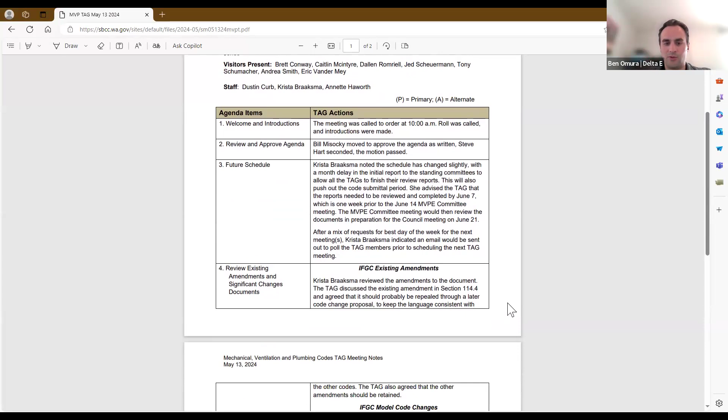These should have been posted with the meeting information for today's meeting. So I don't know if there's anything here that anyone wanted to discuss, or someone like a motion to approve the minutes. The only thing I noticed was I was not recorded as present, but I was present. Okay, we'll get you added in there. Thanks, Dave. Anyone else?

You know, I don't see my name on the present either. This was probably before you were actually on. Yeah, this was the calendar, May 13th, previous meeting. Okay, so it wasn't the one last week. Okay, right, I was not there. Thank you.

All right, so I don't know if someone wants to make a motion to approve the minutes with adding Dave on. I'll make a motion to approve the minutes with adding me as attending. Thank you, is there a second? Second. Thank you, all right, any further discussion about that? All those in favor of approving the minutes as shown, including Dave Price as attendee, please say aye. Aye. Aye. Aye. Any opposed? All right, thank you.

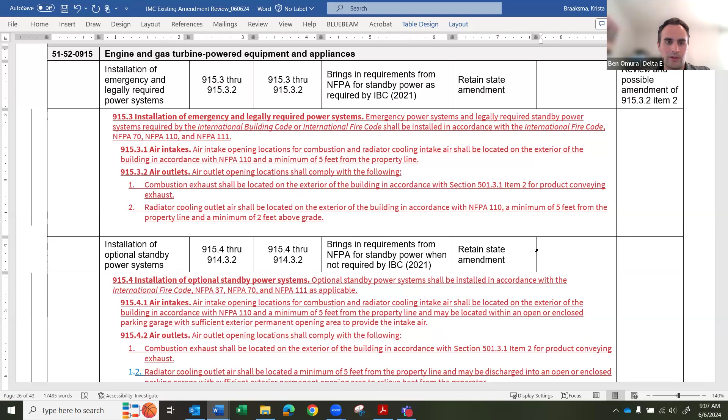Is Jonathan on? Maybe I will try to summarize what you had sent. So I guess my understanding of Jonathan's summary is that he had gone through NFPA 110 and some other notes, and found that NFPA 110 allows for the emergency power standby power systems to be located outdoors on a pad, and the requirements here would only be looking at installation within a building. So it didn't seem like there was any added restrictions imposed by this code language currently. There of course could, like if someone wants to write an amendment or a proposed amendment to clarify this section, that would certainly be something we could pick up in further meetings down the road.

Krista, I don't know if there's anything else that you saw in what Jonathan had sent. No, that was pretty much what I got out of it. Okay, yeah, so anyone else want to discuss any other items around this section that was added last code cycle? Or do we want to move on to just recommending to retain it?

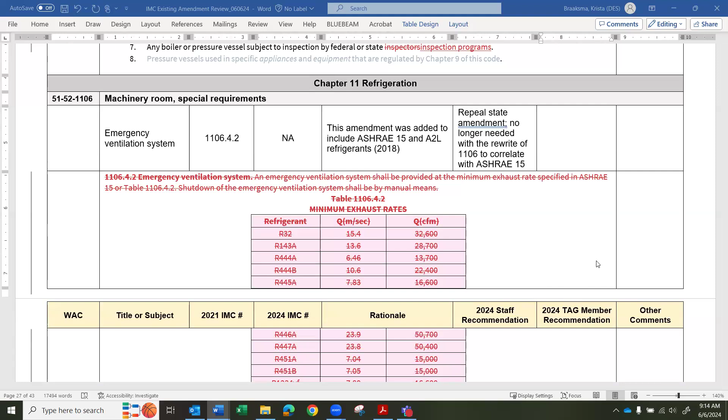Okay, now we get into refrigeration. We originally had an amendment to section 1106.4.2 for A2L refrigerants and reference ASHRAE 15. However, the model code now has all that information in it, so the staff recommendation is that we do not need this state amendment any longer.

Was the table for the exhaust rates actually a state amendment, or was that part of the model code language before? That was part of the state amendment, and I think it came directly from ASHRAE 15.

Okay, yeah, I think there was just an additional line provided. Oh, okay. But yeah, I guess like you're saying, Krista, this is really kind of following the model code guidance to provide more specific direction per ASHRAE 15 on ventilation requirements that are now in the model code.

Makes sense to me, and the codes on refrigerants are changing rather quickly. More to come, but this is the current state of affairs. So good to keep up with ASHRAE 15 is my point.

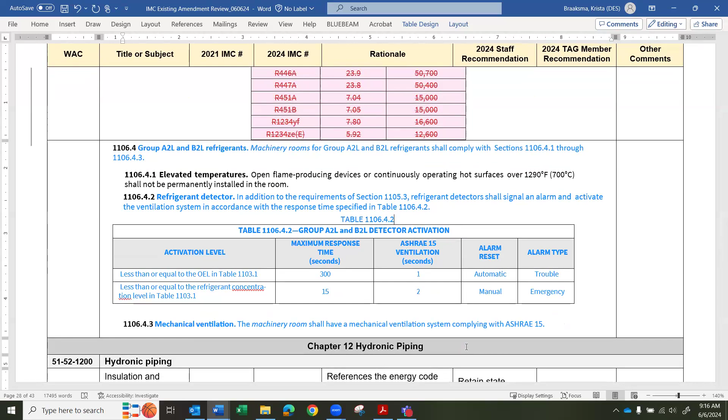And this makes sense to me too, to also repeal the state amendment. And where is ASHRAE? Oh okay, there it is. Gotcha. Cool.

Well, I will make a motion to repeal the state amendment for section 1106.4.2, and, well, isn't that enough? Yeah, I think that's probably good for this section. I'll second that. Thank you. Okay, so motion is seconded.

Any discussion regarding repealing the existing exhaust rate table that's in this section? All right, hearing none, all those in favor of recommending repealing the state amendment for section 1106.4.2 as well as table 1106.4.2, please say aye. Aye. Any opposed? Okay.

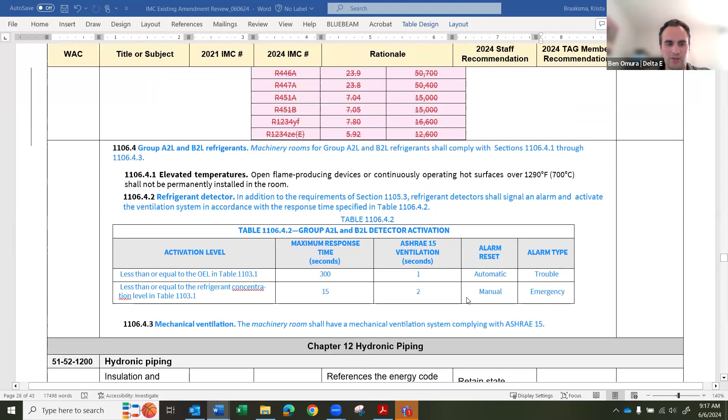And that section above, Krista, that's all new model code language, right? So we're not, yeah, that part of this language was replaced with this language. All right, so we'll look at that more in the next section. All right, thank you.

So the amendment to section 1209.5 adds in the energy code requirements for thermal breaks and insulation on outdoor snow melt systems, radiant floor heating, all that.

Yeah, Krista, do you have more? Maybe this might be a good one to revisit in the near future, just to see if there's any alignment needed with energy code requirements. I've seen this before and it always puzzles me why we're putting these insulation requirements into the mechanical code, and I would hope it would be covered in the energy code.

Yeah, I'm accustomed to just pointing to the section that references these numbers and following the philosophy of saying it as few times as possible in the most likely place. I think the intent was just to not force someone to go pull out another book.

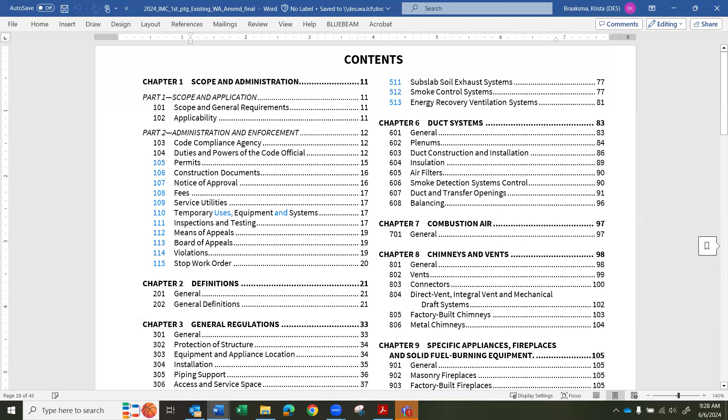Aha, my internet came back. It's playing the hokey pokey here. I'm just going to relocate to a new space that has internet connection. I apologize. All right, I heard you fine. So, oh, okay.

Yeah, you have to also kind of look at the next two sections. They specify the requirement for thermal break, for radiant floor as well, those sections in the 1200s, right?

It is logical that requirements for radiant floor heat inside a space would require more insulation than an outside snowmelt system. Even though the snowmelt system is subject to more extreme temperatures, it only operates for short periods of time during those extreme temperatures, whereas the in-floor radiant operates 24/7, 365.

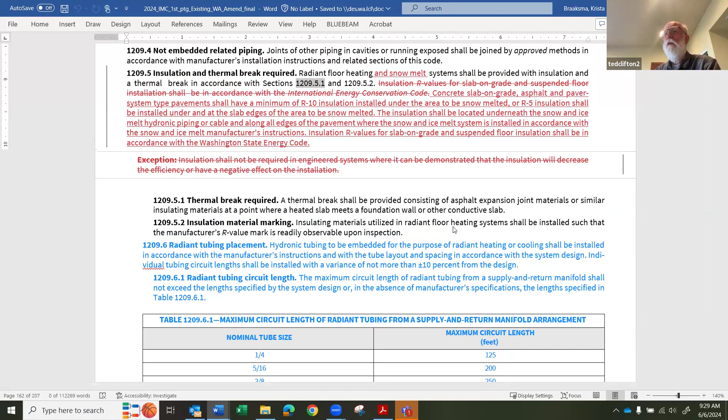Yeah, I would say that seems to be the intent. There could be some improvements to make sure it's clarified, and also make it so it's obvious what type of system it's applying to as well, because 1209.5 is for both radiant floor and snowmelt. A lot of the added language is directed for snowmelt only, right? But then, yeah, I mean, last sentence could potentially apply to both system types.

Yeah, good point. I mean, just thinking for that potential code change proposal, that first sentence in red, it'd be nice if it said for snowmelt systems and then just go on, or even make a subsection for that. But that's a code change proposal.

All right, so I guess Kevin, you feel, or you want to just kind of keep the initial motion? Yes. Okay. But yeah, appreciate the commentary, and thanks Mike for providing some additional feedback. Anyone else have any comments for this or not?

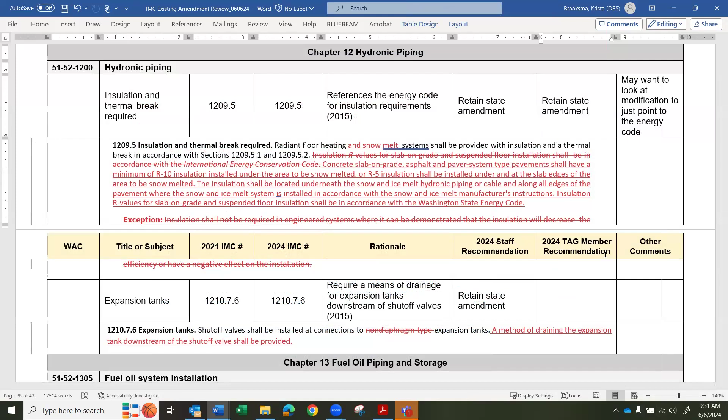Okay, the next one just adds a requirement for being able to drain the downstream of shutoff valves.

All right, any discussion on this section? It's from the 2015 code cycle.

So I have a question. Wouldn't that be upstream of the shutoff valve? When you're speaking of draining it, the water's going from the tank either past the shutoff valve to something else, in which case the shutoff valve has to be open, or prior to the shutoff valve is where a drain would take off to the side that would allow you to drain everything above the shutoff valve. I think the language here is just goofy. Yeah, and I guess like Ted, you're thinking the drain needs to be occurring between the shutoff valve and the expansion tank.

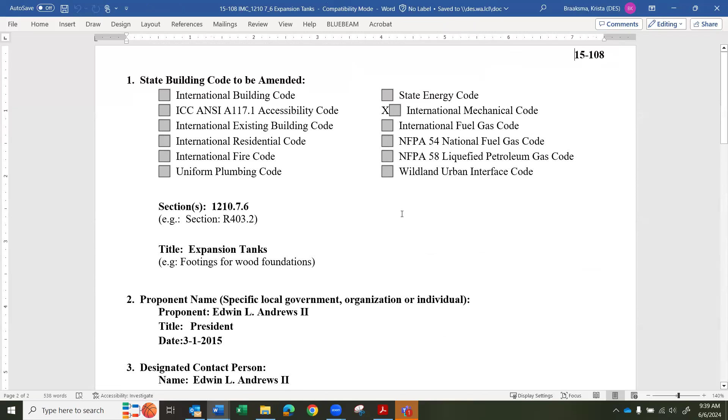Ooh, Krista's got it right here. Yeah, it just doesn't say much.

So yeah, it changed considerably during the original process. The proposed language was a little bit different.

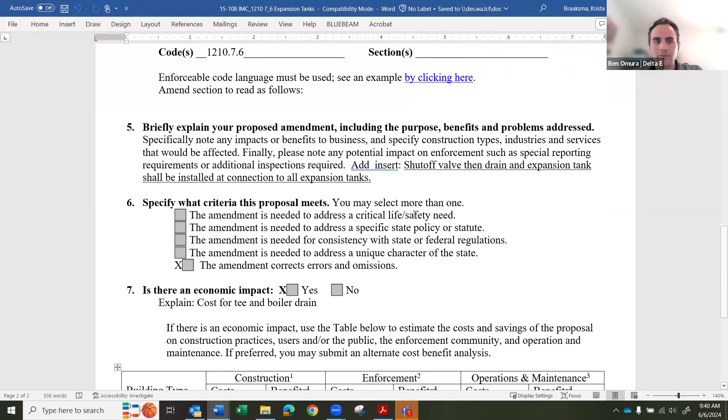And there's not much on a rationale here. Right.

And I noticed the cost benefit is for residential only. Those are probably little diaphragm tanks. 5 cent cost, that's per square foot, I believe. Oh, the radiant system. Thank you.

Well, I'm just going back to these words, downstream and shutoff valve. I think the intent is, what I'm seeing in my head anyway, you have an expansion tank in line with the hydronic system. You've got a shutoff valve to it.

Again, the downstream doesn't quite make sense. You kind of need another drain valve between that shutoff valve and the expansion tank to get the water out of there. So downstream doesn't make sense because in an expansion tank, the water goes in and out, right, depending on the pressure.

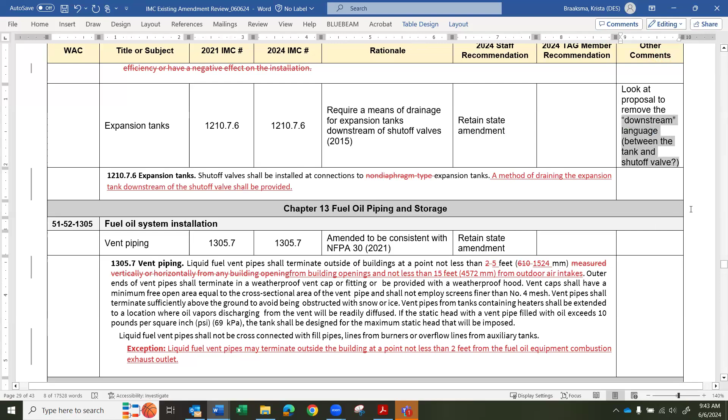Then we have to recommend a code change proposal because it makes no sense like it is. I do see some low-story commercial buildings that are set up in the same system as residential properties.

And that's essentially what I have, but this makes no sense for what I have. It makes sense to have a method of draining if the tank is in the typical upright fed from the bottom position, but it doesn't make sense if it's hung below the fill pipe, as it tends to be these days with the air bladder tanks. Maybe just put a suggestion in there that it requires this if it's being bottom fed.

And again, that's a code change proposal. Yeah, which I'm totally fine with, but we need a code change proposal because this makes no sense. It's not complete, it actually needs a section.

That's interesting. Our options are either approve or code change proposal. We're kind of stuck with those two options unless there's a model code change. Right, because right now you're operating without any public notice on a specific requirement to remove or add stuff.

So you just need that added layer so you can make the announcement on the agenda that we're going to talk specifically about changing this section, so anybody that has an opinion or interest in that particular section can attend.

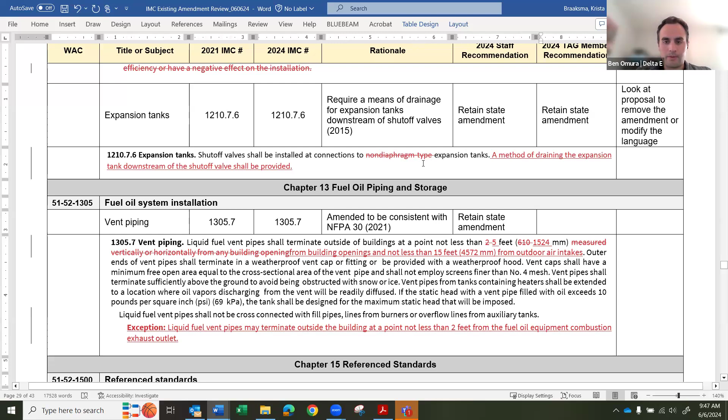Okay, 1305.7, amendment to be consistent with NFPA 30.

All right, so it looks like this was added last code cycle, but there's not a new NFPA 30 that's been published. Is that correct? I don't believe so.

It looks like 2021 is the last one. Or no, there is a new one. There is a 2024 edition. Yeah.

However, what is the model code referencing? Model code still references the 21 edition. Well, there you go. Oh, wait a minute. I'm looking at the 21, so of course it would. Oh, right, where did I put...

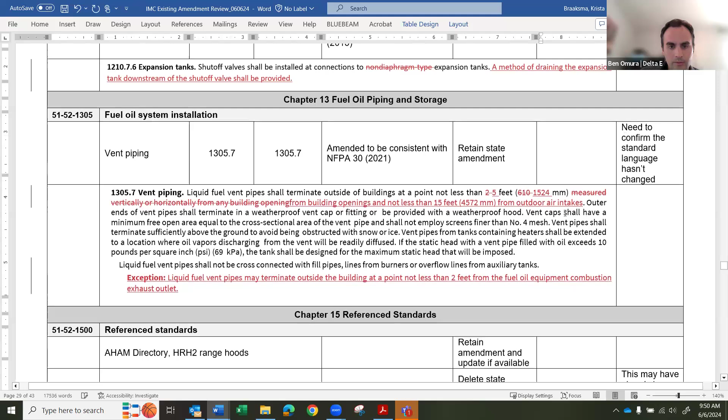I'm guessing this hasn't changed in terms of the clearances, but I think it would be good to confirm there's no change on the NFPA side. Yeah, I can do that. I'm not finding my code right now. Okay. There it is.

All right, so I guess, Krista, we're gonna take a look at the 2024 edition. Yeah, I'll take a look at it. Okay.

I guess, could we just recommend to retain it pending any NFPA changes? Makes sense. I mean, this may not have any changes in NFPA 30, but if there's a note there to catch that, then pick it up.

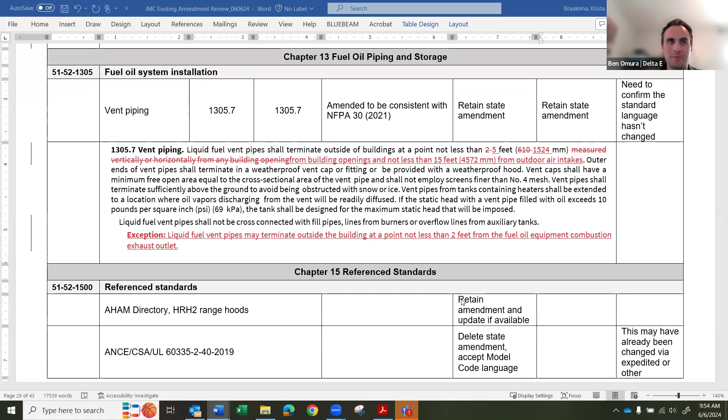Okay, so the rest of the changes or state amendments are reference standards associated with the other changes. I do have noted that the council will be looking at a possible rule change to update the UL 60335-2-40 standard to the one that I think is now a 2022 standard, the 4th edition, referenced by the statute. And they will be determining whether or not we go through special rulemaking to do that, or just not comply with the statute until the 2024 edition goes into effect.

And some of these will have updated editions. I haven't gone through and checked all of them, but I will go through and update to the more recent edition for ASHRAE 62.2. So I don't know if anybody wants to comment on any of the UL standards or any of the standards.

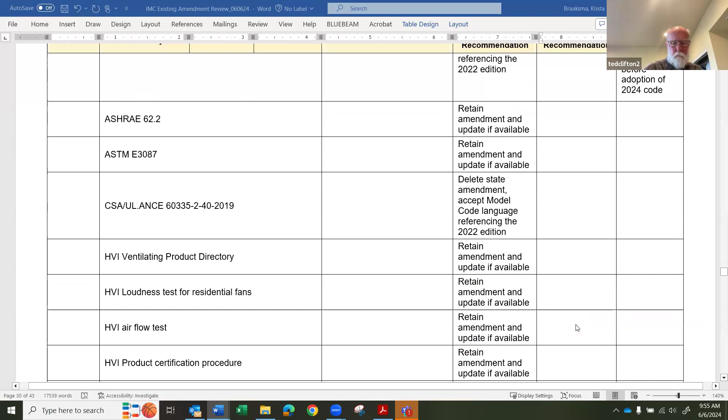Want to just do these in one swack? My name is Harshad Inamdar, I work for Rheem Manufacturing. May I speak? Sure, Harshad. Yeah, sorry, I couldn't find the hand gesture, so otherwise I would have raised my hand.

But at least I think the UL standard that I see on the screen, 60335-2-40, the latest edition is the 2022 edition. Right, and that's what it says in the comment. Oh, okay, that's... sorry, yeah, okay, the model code edition is the 2022.

But the council will be determining whether they adopt that standard before the 2024 code goes into effect, or if they'll wait until the 2024 code to make that change.

So this might get put into the 2021 edition? Yes. And that would be the same for the other 60335 section at the bottom? Since there are so many standard bodies in the name, it's added under each one, under ANCE, under CSA, and under UL in the reference standard section. There would also be associated changes in Chapter 11 for the 2021 to reference the more recent versions of that and ASHRAE 15.

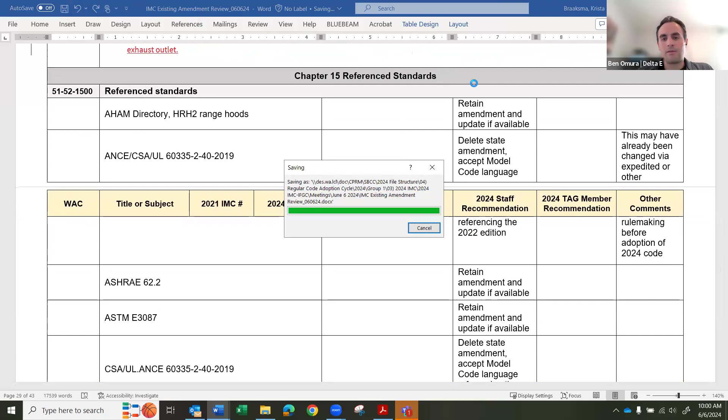So Krista, does that wrap up the existing state amendments? I don't think there were any others. Did we cover the fire one that I was supposed to look into while I was having internet connection issues? We did talk about that one and moved to retain it, Jonathan, based on Krista's summary and findings, which she forwarded to me, so I provided a secondhand summary of that. Perfect, I just wanted to make sure it was clarified for you folks. Thank you.

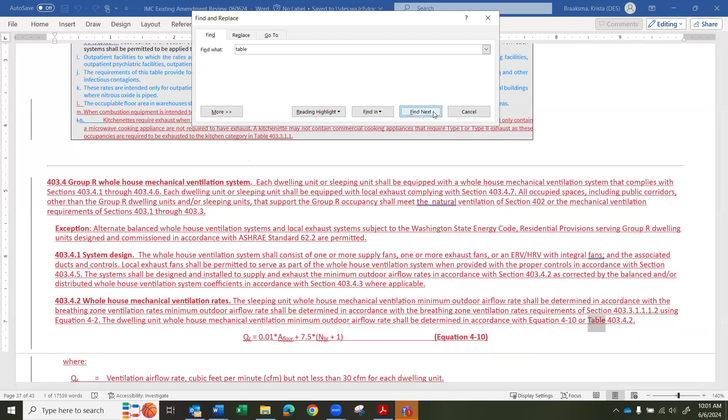All right, doing a search for table takes a bit longer than expected, there are a lot of tables. You can put a space in front of the search to eliminate those, right in front of the key.

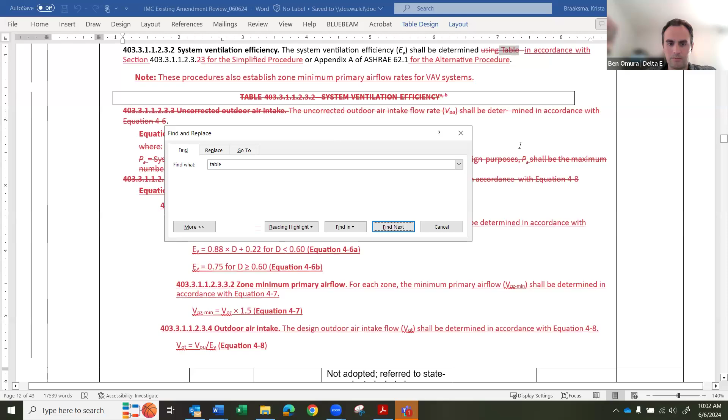That was just until we've reviewed the model code changes. Same with this. Okay, so we've got one table to look at for chapter 4 changes and one table to look at for chapter 5 table changes.

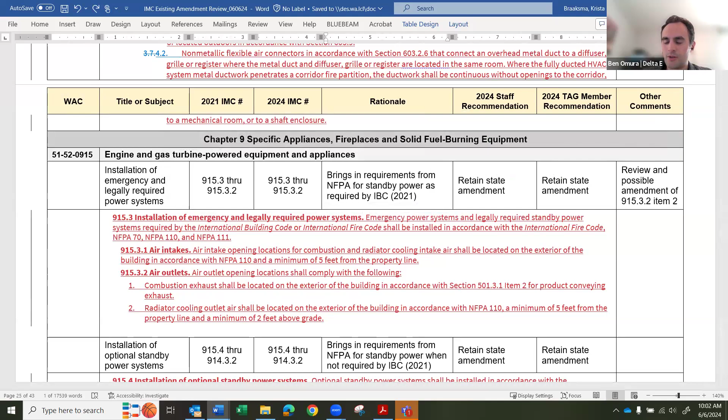All right, awesome. We move on to reviewing the model code language, and again, we're providing recommendations here to adopt the changes, but that doesn't preclude us from doing additional work to look at proposed changes to those sections further on following the issuance of this report. The main purpose here is to flag things that have a significant impact or possibly add additional costs to the code. We won't necessarily be changing them, but we can make a recommendation that a code change proposal be generated, or if there's a conflict with a state amendment or statutory requirement...

We can look at assigning someone to write a code change proposal, or if it's easy, just recommend minor changes. But the big thing is to identify where there are big changes in the code, so people with an interest don't have to look through the entire code to know where the changes are that they may want to look at for developing their own code change proposals.

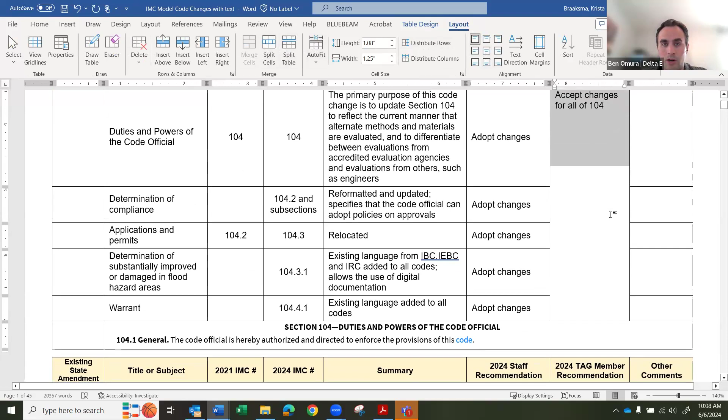When I reviewed the section 104 changes, I would agree with the staff recommendation that there was no cost impact associated with that. So I can make a motion to accept the model code changes for section 104. Is there a second for that? Second. So motion and second to go with the recommendation to adopt changes to section 104. Any further discussion here? We looked at this a little bit when we looked at the fuel gas code, as Krista mentioned, so it's pretty similar. Hearing none, all those in favor, please say aye. Aye. Aye. Aye. Aye. Any opposed? Thank you.

Section 112.3 just states explicitly that the qualifications for the Board of Appeals has to be from people who are familiar with the provisions of the code, and not just any employee of the jurisdiction.

Sounds like it makes sense. I don't have any issues with that being added. A lot of jurisdictions completely rewrite chapter 1 as it is. This one was also in the fuel gas code model code changes. Right.

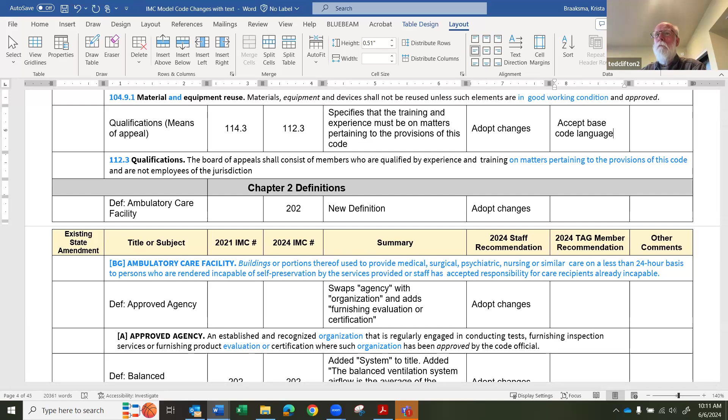I can make a motion to accept the new base code language in section 112.3. Second. All right, motion is seconded. Any further discussion? All those in favor of recommending adoption of model code changes to section 112.3, please say aye. Aye. Aye. Aye. Aye. Aye. Any opposed?

We have a number of new definitions and modifications to definitions. The first is a definition of ambulatory care facility. I haven't looked at the DOH requirements to see if this is consistent, but I am guessing that it is pretty close. I think it might have actually come from John Williams to begin with, and I'm sure that if it doesn't, they will be submitting a code change proposal.

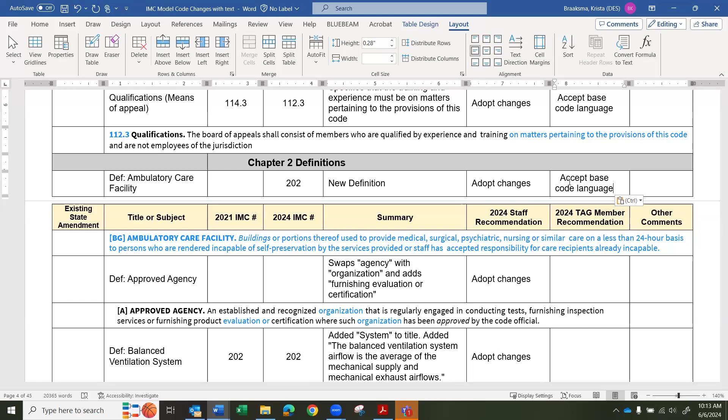All right. Okay. Anyone have anything to bring up for this one, or feel that it is adding new cost or other significant changes? Anyone want to make a motion to recommend adoption? So moved. Thanks, Ted. I'll second. Motion is seconded. Any further discussion for this definition? Hearing none, all those in favor of recommending adoption of new definition for ambulatory care facility, please say aye. Aye. Aye. Aye. Any opposed?

The definition of approved agency was changed by replacing agency with organization and including that it be product evaluation along with product certification. I will move for approval of this one. Is there a second? I'll second. So motion to recommend adopting model code changes for approved agency definition. All those in favor? Say aye. Aye. Aye. Aye. Aye. Any opposed?

And a modification of balanced ventilation system - they added system. This is one where I think we had discussed during the existing amendment review that the new definition they have here does change what you could potentially balance the system at. So I would say it's probably reducing the requirements in some ways, or at least allowing for a lot more variation in how the system could be balanced between the supply and exhaust air.

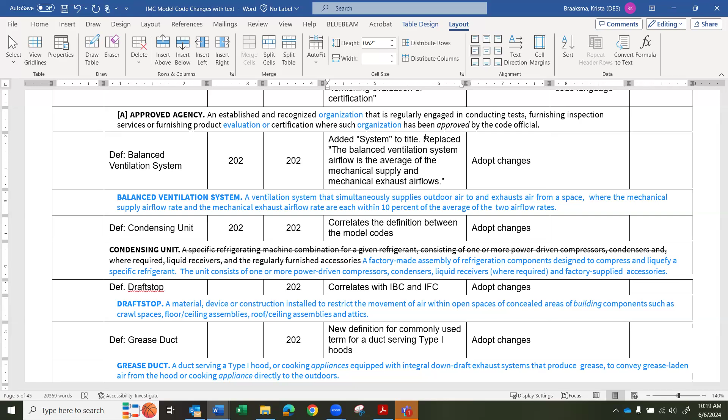All right, Ted, did you actually have a motion? Yeah, my motion was to recommend to adopt this change. Okay. Down for the second. Okay, so any other further discussion?

I guess I will say the new language is specifying an average versus I believe that the older language was based on the supply airflow rate. So we can look at that further as we move forward, but any other discussion for this one?

All right, all those in favor of recommending adopting the definition for balanced ventilation system, please say aye. Aye. Aye. Aye. Aye. All right, any opposed?

Okay, next is the definition of condensing unit. And this just tried to correlate the definition between all of the model codes.

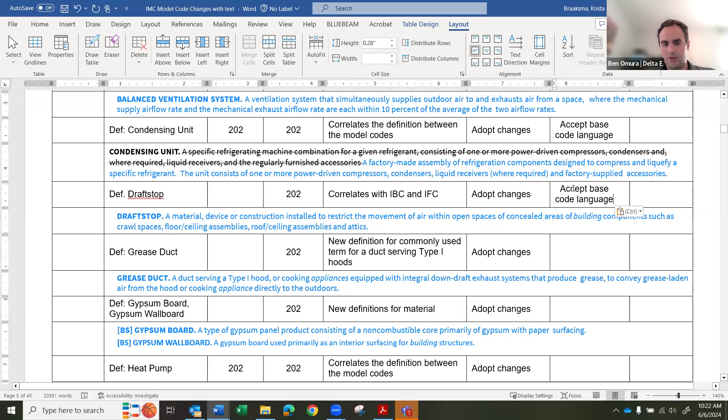So I move to recommend adoption of that change. Second. All right, motion to recommend adoption of definition for draftstop. All those in favor, please say aye. Aye. Aye. Aye. Any opposed?

And then the new definition of grease duct.

I'll move to accept. I'll second. All right, any discussion here for this new definition? I think we saw it a bunch in some of the existing amendments, and we'll see it more.

I'm confused by this definition. Why is integral downdraft exhaust system included in here when this could be updraft, side draft, anything, if it's a type 1 hood? Oh, excuse me, it's a parenthetical statement: a duct serving a type 1 hood to convey grease-laden air, or a cooking appliance. Okay, never mind, just had to talk that through. So no issue.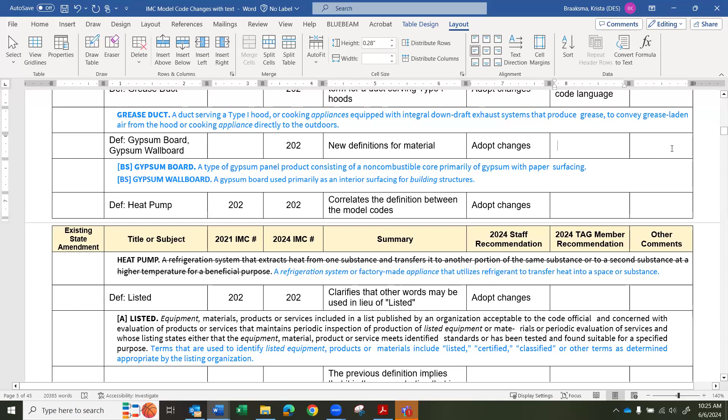I'm trying to figure out what the reason is for having two definitions. I know just above we were talking about, if you could scroll back up, yeah, the draft stop. So would a piece of gypsum wallboard, as we currently call it, used as a draft stop then not be a wall surface? Or why else would we be doing this?

Wondering if gypsum board includes ceilings as well, and wallboard does not. Yeah, it's curious because, I mean, when you go to the store, it's one product, right? GWB, it's always been GWB as long as I've been in this industry. Well, since the early 1960s when they created the first GWB, it was strips 18 inches wide prior to that.

I can pull up the rationale if you want to look at it. Maybe.

And further on in chapter 6, the model code does use gypsum board to clarify some of the materials. And I see that exceptions... gypsum... oh go ahead, plumbing, sorry. Yeah, sorry. You see the gypsum wallboard definition references the gypsum board definition.

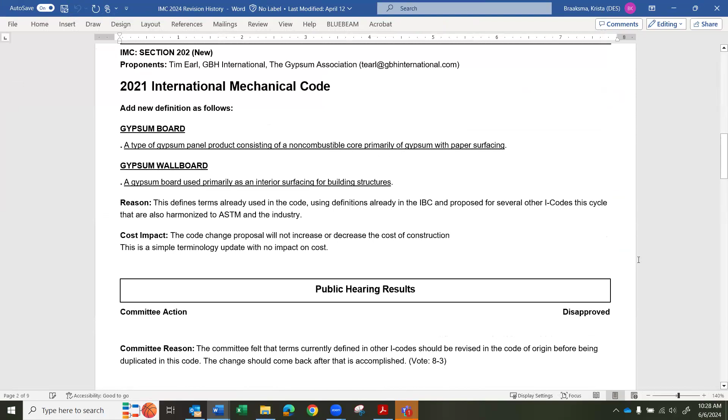Is DensGlass technically gypsum wallboard? Because maybe that's what they're looking at, is a fire rating for products on the exterior of the building to meet the 1-hour fire code requirements, and the other one does not have a fire code piece to it. They're two different types of products. DensGlass does not have paper surfacing.

See, yeah, I'm just trying to make sure. I'm just trying to help walk through the thought process of why they would separate the two out. Is it, obviously they're trying to see one has fire protection and one doesn't. And is there a product that has it exactly the same except you purchase the fire rated version? Yeah, well, you get the idea, I'm trying to talk it through with you guys.

I don't see why it's separated either, unless DensArmor or products like DensArmor would fall in that category. They are separated in the building code, if that helps. The 2021 building code's definition of gypsum board is slightly different than what they're proposing, but the definition of gypsum wallboard is the same.

Is there something associated with the water resistance of a particular product, like lining shafts, that kind of thing? Most of that difference is in the adhesives in the core, not just the surface. I mean, it's both, but maybe there's something in the ag industry or industrial that I'm unaware of. Most of my stuff is more small commercial and residential.

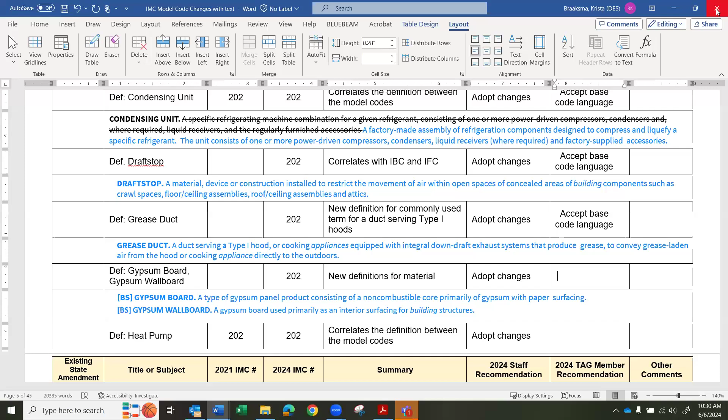So we can still continue discussion, but in the interest of time, I'll move to adopt, since that's just to align with what the national codes are doing. I'll second. Thanks, Jonathan. I think that makes sense. Any further discussion? Hearing none, all those in favor of recommending adoption of the model code definitions for gypsum board and gypsum wall, please say aye. Aye. Any opposed? Thank you.

And a modification of the definition of heat pump. I have a problem with that. So air to water heat pumps, for example, with the monoblock system, the refrigerant only transfers heat to water, and the rest of the unit transfers heat into the space. So the exact wording of this doesn't describe an air to water heat pump. In fact, it doesn't really apply to a ground source heat pump either. So it's just an incorrect definition.

Do you think the substance category wouldn't feel like it's describing a water system? I would accept that substance is anything, any material. It's not very descriptive, but it doesn't seem inaccurate, really. So substance can be the water that then gets transferred into the space. Yeah, I can accept that.

All right, and then Brad, I saw your hand come up. Yeah, I'm just getting ready to get off here and wanted to let everybody know and thank everybody for their time. All right, thanks, Brad. I think Kevin, looks like you're back on. Yeah, so is Ian. Okay, I think we should still be good. But thanks, Brad.

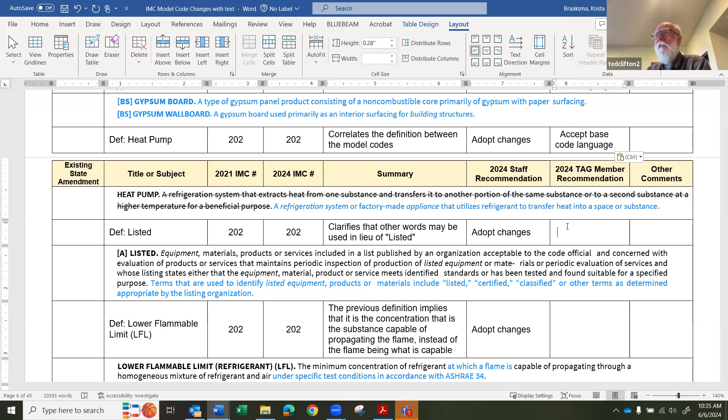Thank you. And next is a change to the definition of listed, to include similar terms to listed such as listed, certified, classified, and anything else. I think this one was in the fuel gas code as well. I think it's like a global change they're making.

I'll move that we accept this one. Second. All right, motion to accept model code changes to definition for listed. Any further discussion? Hearing none, all those in favor, please say aye. Aye. Any opposed?

And a change to the definition of lower flammable limit. I think that looks clear enough. Make the motion to adopt. Second. All right, please speak up if you have any comments for these, but try to move through these pretty quick. So all those in favor of adopting model code changes to lower flammable limit for refrigerant, please say aye. Aye. Any opposed?

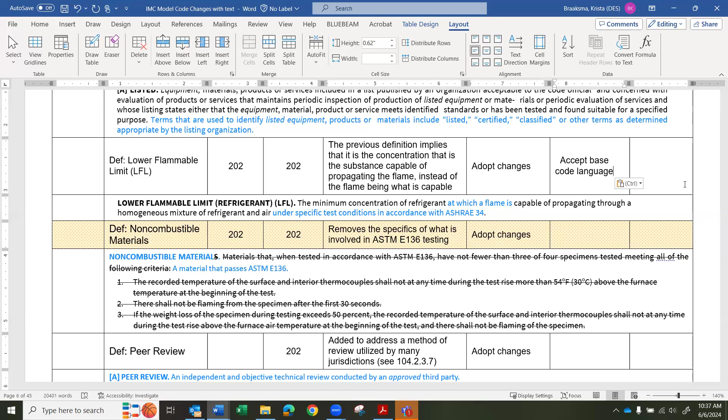Okay, next is the first one that I've marked as a significant change in the definition of non-combustible materials, where they delete out all the examples and just refer you to ASTM E136 and state that it has to pass ASTM E136.

And where the ASTM aligns with these sort of things, or does it change how this is happening? You saying these are just examples that were crossed out? Right, I think that's actually defined in ASTM E136.

All right, if that's the case, I'd move to accept. Second. All right, motion to accept. I guess kind of for what we're trying to do, I don't know if anyone has any comments on whether the model code changes present a significant cost increase or potential cost increase, as Krista was flagging.

Yeah, and if you don't think this is significant, we can take off the flag. You know, I would argue that since material selections are typically made in an office by an engineer or other qualified professional who has access to ASTM E136, this is just a clarification that sends him one place for all the data he needs, all the information he needs. So this should actually be a reduction in cost or effort.

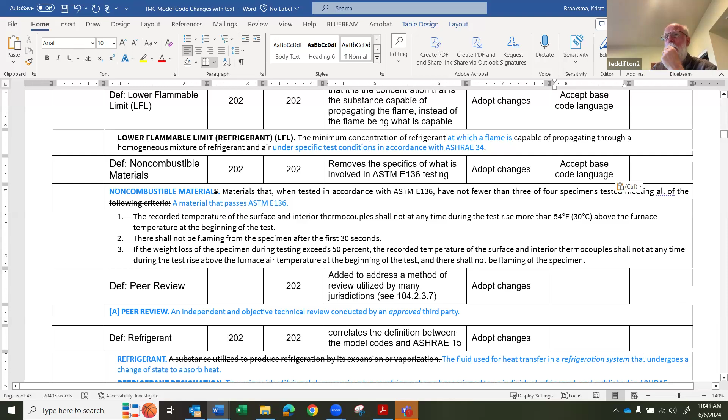Thank you. New definition for peer review, consistent with section 104.2.3.7.

Sounds good. I'll second that. In way of discussion, should we just assume that approved goes back to the definition of approved, which means it's the local jurisdiction that approves this type of third party or other agency? That's what the italicization of approved would indicate, yes. Yeah, that's what I figured. So, yeah, I'm in favor of this.

Okay. Kevin, I think, was that a motion? Sure, I'll make a motion to approve, or adopt the change to the definition of peer review. I'll second. So motion is seconded. All those in favor of recommending adoption of definition for peer review, please say aye. Aye. Aye. Aye. Aye. Any opposed?

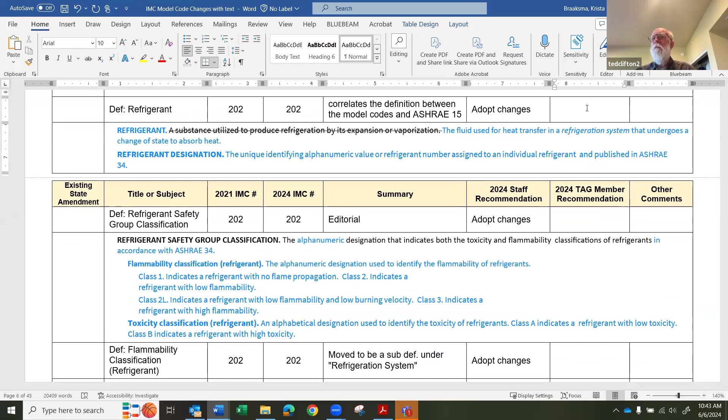I'll move that we accept this change. It makes perfect sense. Second. All right. All those in favor of recommending adoption of model code changes for refrigerant and refrigerant designation, please say aye. Aye. Aye. Aye. Aye. Thank you.

Okay, then modifying the definition of refrigerant safety group classification. And this took the independent definitions of flammability classification and toxicity classification and moved them to sub-definitions under refrigerant.

All right, I just think class 2 and class 3 need to get indented to be their own lines. That would match the model code as well. So it should be class 1, class 2, class 2L, class 3. Perfect.

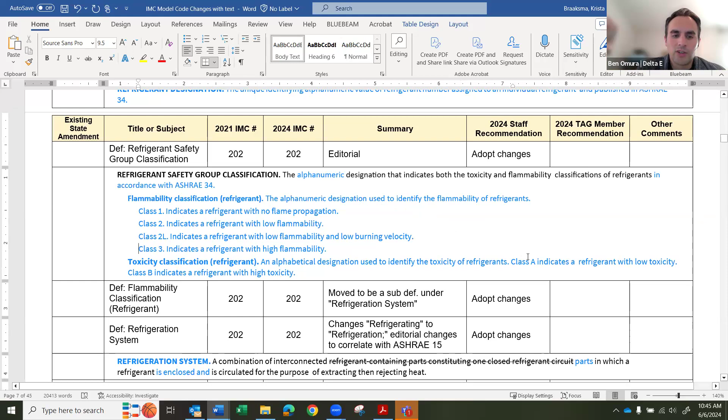Possibly the same thing on that toxicity classification. I think it's all - or is that a separate definition, Krista? Well, no, it's a sub-definition under refrigerant. Okay. Yeah. I see.

But yeah, I think Ted's point is apropos, the Class A and Class B need to... Oh, I gotcha. Yeah. That's actually how it appears in the model code as I'm looking at it. Oh, the way it's shown. Yeah, it's two sentences together. I think the two definitions had come from different sources, so they had slightly different formatting. That's how it's written now. It doesn't necessarily stay like that.

I'll move that we adopt these changes, or recommend adoption. Is there a second? Yes, second. Thank you. Okay, motion to recommend adoption for model code changes to refrigerant safety group classification. All those in favor, please say aye. Aye. Aye. Aye. Aye. Aye. Any opposed?

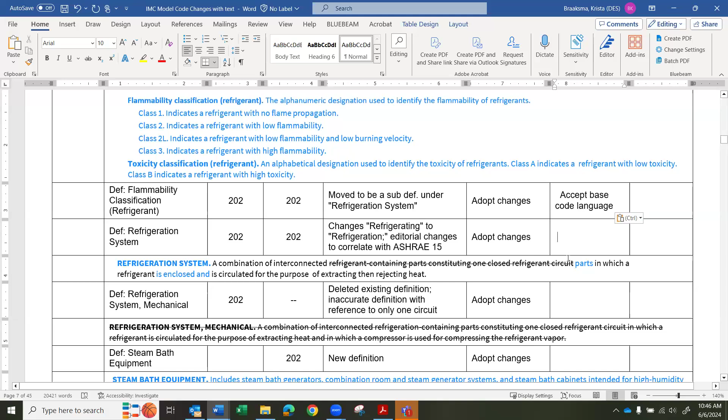And then this was actually part of that, so I'm just going to do that. The definition of refrigeration system was changed. It was refrigerating system, it's now refrigeration system, and some minor changes for consistency with ASHRAE 15.

I'll move that we recommend adoption. I'll second that. So, motion to recommend adoption for changes to the definition of refrigerating or refrigeration system in the model code. All those in favor, please say aye. Aye. Any opposed?

And the next one, they deleted the definition of refrigeration system mechanical, citing that it was inaccurate and didn't need to be there. Yeah, it's redundant. Agreed.

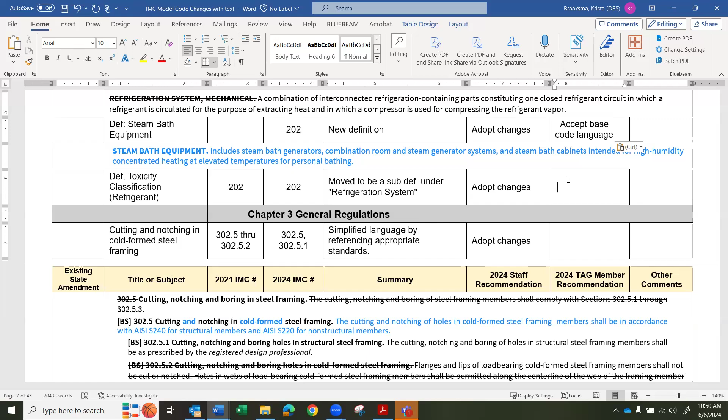And then toxicity classification was deleted from the Ts because it's now a sub-definition of refrigeration system. So I can cheat and include this under the previous motion if you want. I would agree to that. Okay, anyone have any opposition to that? I guess, Krista, maybe one thing for that is, I think it's under refrigerant safety group classification definition.

Okie dokie, thank you. And that moves us into chapter 3.

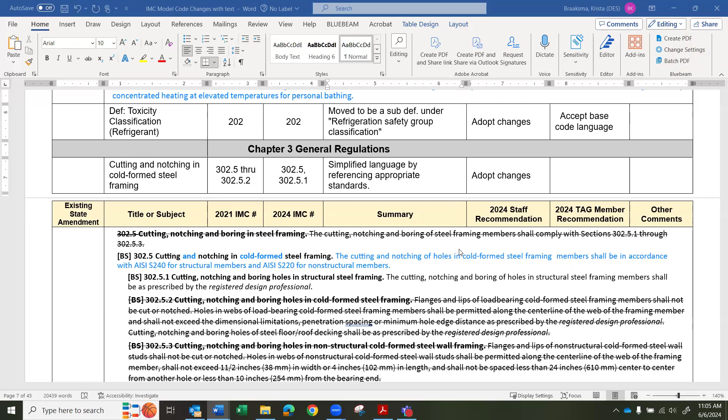So they simplified the language in cutting and notching by deleting a bunch of the text and just referring to the referenced standards. I'll move that we recommend adoption of these changes. Is there a second? Second. Any discussion here from any tag members or others on the phone? Please remember to speak up or raise your hand if you do. Otherwise, all those in favor of recommending adoption of model code changes to 302.5, please say aye. Aye. Any opposed?

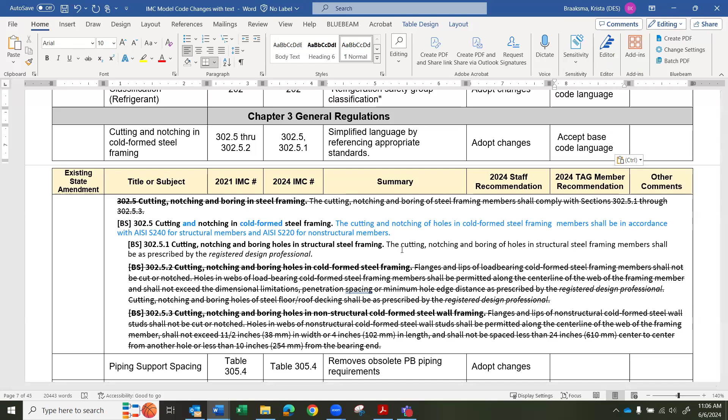And again, if anybody feels that this is a significant change, or any of the upcoming ones are a significant change and aren't flagged, voice your opinion and we can address it. Thanks, Krista.

Piping support spacing in table 305.4 removes PB piping. I move that we adopt, or recommend adoption of, that removal of PB piping. Second. All those in favor of adopting the model code change to remove the PB piping requirements in table 305.4, please say aye. Aye. Any opposed?

And the next one, they took the shielding requirements out of the body of the protection against physical damage section and made it its own subsection, but no changes beyond just moving the section. They did change the size trigger, or the spacing trigger, from 1.5 to 1.25. I believe that's consistent with what's in the electrical code.

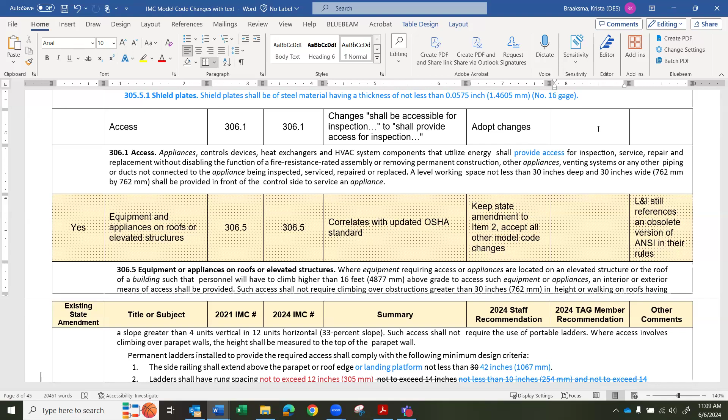Motion to adopt change to the definition of access. I'll second that. Any further discussion? Not. All those in favor of recommending adoption of changes to 306.1, please say aye. Any opposed?

Per our discussion on this section previously, in the existing state amendments, 306.5 is updated to correlate with OSHA standards, and this is a state amendment that we no longer need because L&I has adopted changes to...

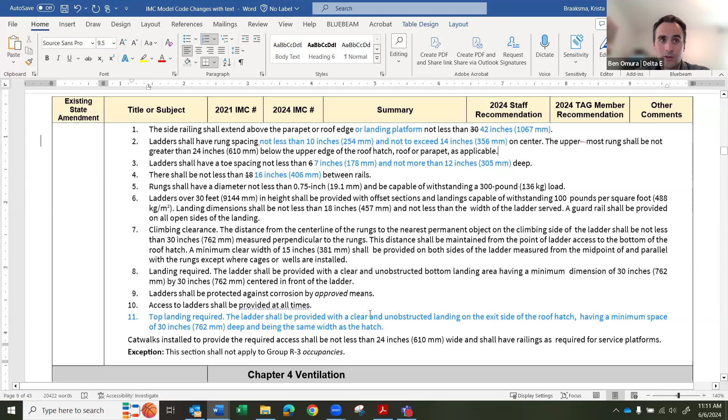Just map everything, align. So let me just unstrike this. All right, and it looks like you had flagged this as a potential significant change. Right, just because all the spacing changes slightly. And item 11 is also added for a top landing, a new top landing.

Yeah, that is significant. So there could be some costs associated with that as well, which is what the yes means. Well, that's not a state amendment. Never mind. But the fill change you have on here is what you flagged, I'm assuming. And this is from OSHA, right? Correct.

It got to align with OSHA, but the implication is there's added cost and that needs to be estimated, or what's the issue? Well, is there added cost if you still had to comply with the federal requirements anyway? Right, yeah. But in that case, there's no appearance of added cost. Okay.

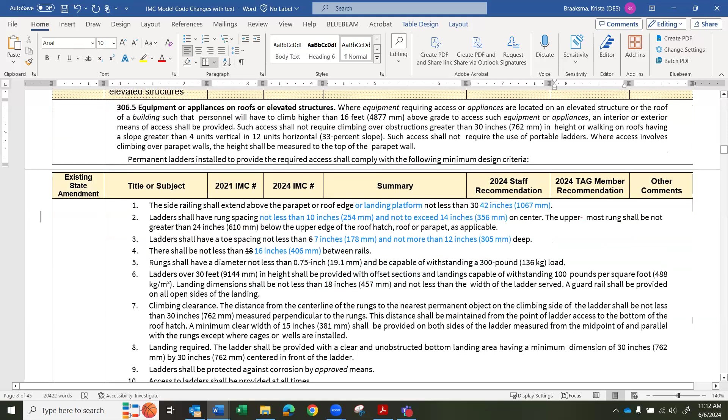Well, let me ask you this. If you complied with the state code but violated OSHA, you're still in violation, right? So I guess I'd argue there's no additional cost, and the state code is just behind the times.

In any case, is a motion available? Or is there work that has to be done here? I would say for the motion, it would be good to include if we want to retain the flag for a significant change here, as well as recommending adoption of the language, or remove that flag.

Gotcha. My reading of this is that ultimately, once the industry is used to the new standard, it's going to be a slight reduction in cost, but initially adapting to it is where there'll be cost involved. So I'd say leave the flag on it, but not try to put a number on it.

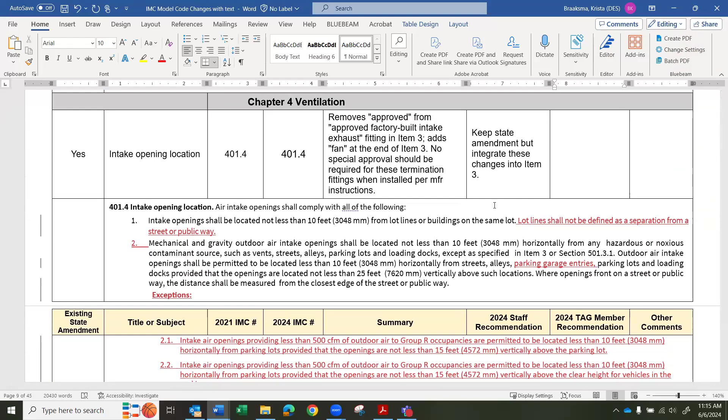Okay, and that brings us into ventilation. All right, most of this is state amendments, but the model code changes are those all in item 3? We kind of touched on this before.

Right, so for factory built intake exhaust combination used in accordance with the fan manufacturer's instructions, the question is, should that actually be fan manufacturer's instruction, or the intake exhaust combination fitting manufacturer's instructions? If that combination fitting is provided by like an ERV manufacturer, indicating fan there seems pretty restrictive.

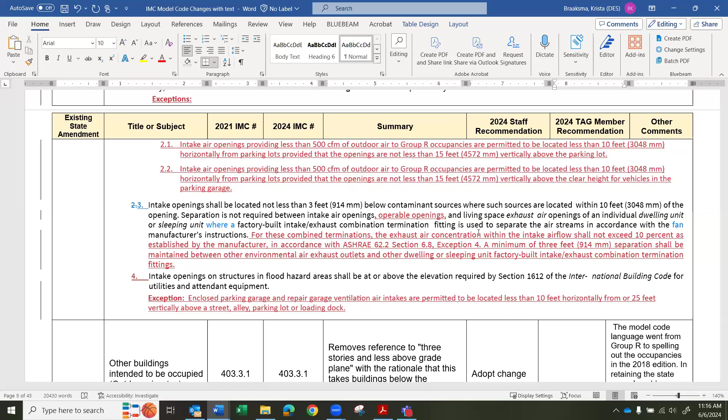I don't know if it would be a significant change, but you're probably not going to have a lot of guidance from a fan manufacturer for those devices. And making a code change to equipment manufacturer seems like it would make sense. Yeah, so probably want to flag that for a future code change.

All right, any other discussions here? Again, even though we're foreseeing an upcoming change, motion to recommend adopting the model code changes.

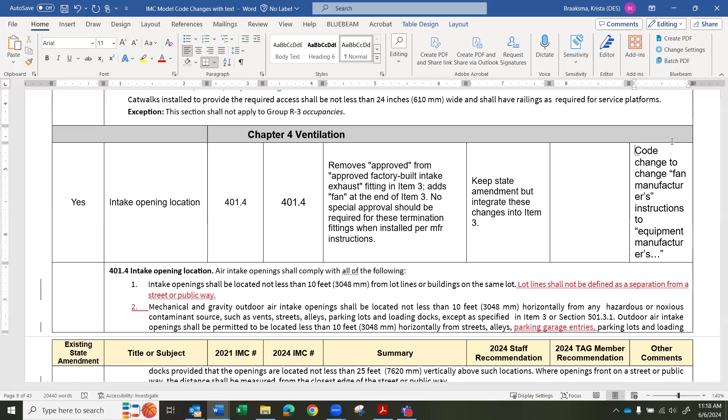Motion to adopt model code changes to section 401.4. Second. Motion and second to recommend adoption of all code changes to 401.4. All those in favor, please say aye. Aye. Any opposed?

So, 403.1, the model code removed the occupancies three stories and less in height above grade plane. The state amendment had sized it to just group R occupancies and not calling out R2, R3, and R4. Part of that was that we had previously not adopted R4, and I believe that's going to change from this point forward. I don't think it makes a significant difference whether it's generic or specific. It just includes R1, I suppose.

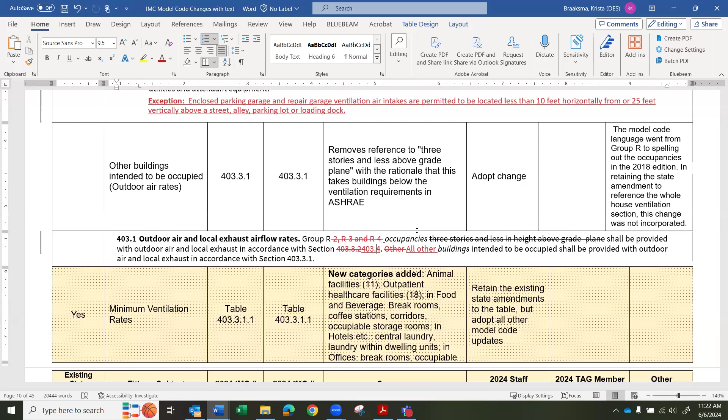And what, okay, so section 403.3.2 is the model code, and is that significantly different than? It's not adopted. Oh, I see. Yeah, that's the section that just gets replaced by the big amended language. Okay.

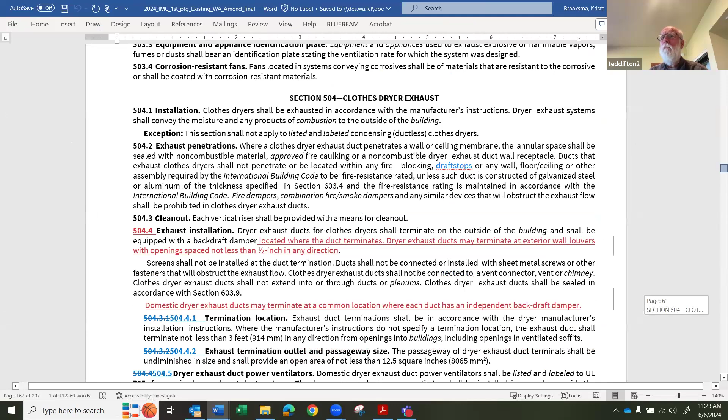And Krista, is this 403.3? Yep. Oh, there we go. I don't know why they put it on automatic numbering. It's just causing me no end of problems. I think is it just 403.3 and not 0.1? Oh, okay, yeah.

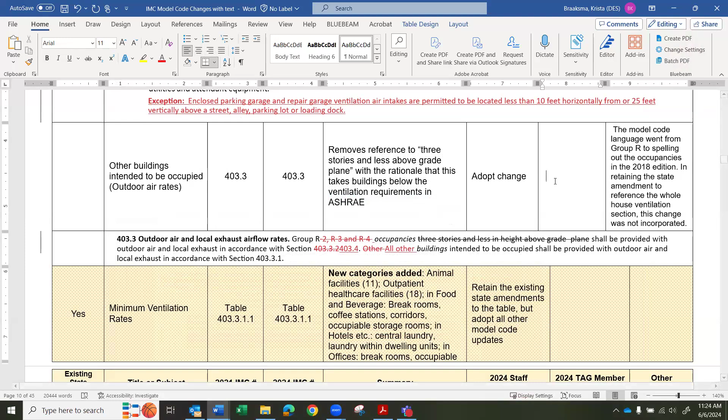Okay, with all that going on, motion to adopt change to 403.3. Is there a second? Yeah, I'll second. So motion to adopt model code change to remove language in section 403.3. All those in favor, please say aye. Aye. Any opposed?

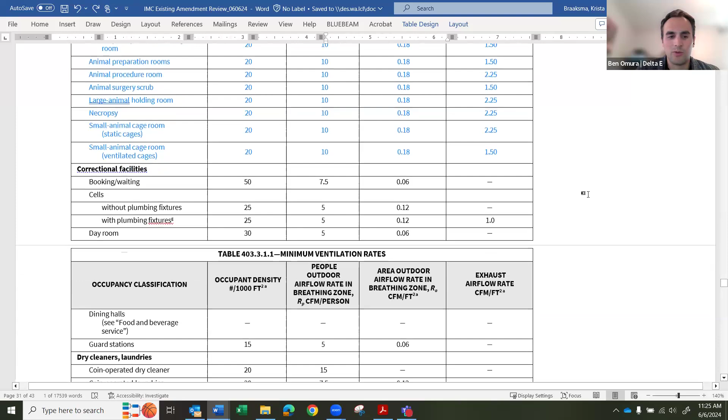Okay. All right, we have arrived at the table. So I know Allie and Laura as well have looked into some of the table changes. I don't know if anyone else had or looking at some of these. Obviously, the model code added a bunch of different new categories and occupancy classifications. So I don't know if anyone had anything specific they wanted to point out, or Laura, did you have any specific items to share here?

I looked at, let's see, at the time there's an existing state amendment for kitchenettes. I'm not exactly sure when it was added, but I did notice that there was a break room category added both under offices and under food and beverage service. And specifically with regards to office kitchenettes versus break rooms, there are different requirements there. I didn't really have any issues with preserving the kitchenette state amendment alongside the break rooms, because I do kind of view them differently. But I know Allie chimed in a little bit about that. So anyway, that's the work I did on that.

Do we have a definition of break room? I don't think so. I don't think that was added. Nope.

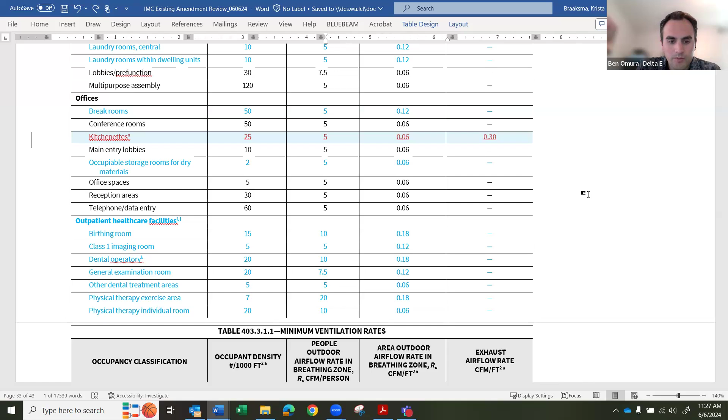And also in this table, there is a large animal holding room. So how large is large? I'm thinking cow. Since it's hyphenated, it would be large animal, and not a large holding room. Right. But he makes a good point, how large is large. So is a large dog a large animal, or do you have to be a cow or a horse? Or what about a sheep? Is a sheep a large animal? It's not a clear definition unless it's given somewhere.

And a lot of this is pulled from ASHRAE 62.1 as well, of course. Is there a mention somewhere that the terms used here are defined in that standard? No, and there's lots of terms all the way through the table that aren't necessarily defined. So large by volume or by weight, another way of looking at it. A peacock versus a horse. Yeah, it seems to come down to whether you can put them in a cage or not. Right, because there are those small animal cage room requirements. I'd say it would be a good idea, if more clarity is needed here or in other areas, to bring in people with more expertise on how these might be defined or clarified, to provide better insight.

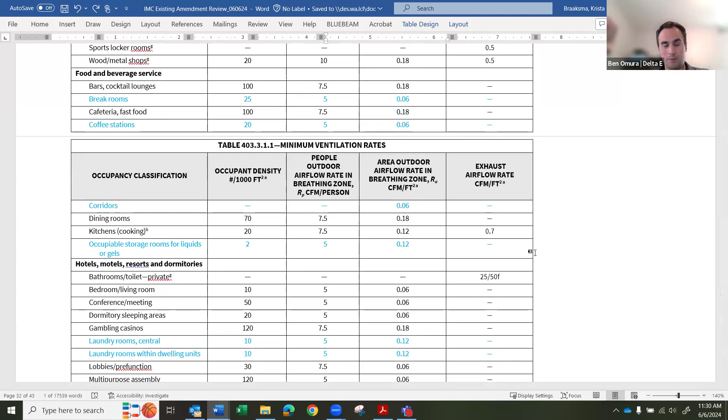Let's roll through these. I think there's other areas good to look at, like they've added a category for laundry rooms within dwelling units to the hotels, motels, and resorts category, whereas we already have a separate section for residential spaces. I notice a lot of these don't have a requirement for ventilation for private dwellings, that's left blank. Yeah, it refers to another table. Right, and there did used to be a requirement for laundry rooms, but that went away in the 2018 edition.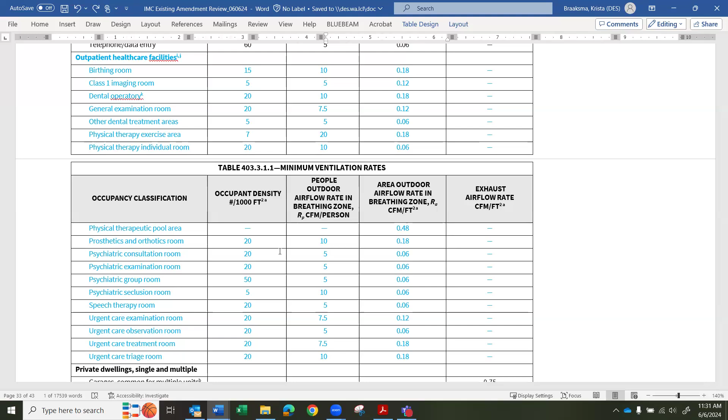There's also the new outpatient healthcare facilities section. Yeah, similar to the animal treatment one, that would be one to look at. I know Ali had done some initial review of the WAC standards it was referencing for some currently referenced ambulatory care facilities and stuff like that. But there's probably a lot more review and amendment potential for what's been added to the table, as well as existing amendments.

So Kevin, you put forward a motion, sorry, I don't know if there's a second for that, motion to adopt the model code changes, or recommending adopting them. I'll second it. Any further discussion for the table here? Hearing none, all those in favor of adopting model code changes to table 403.3.1.1, please say aye.

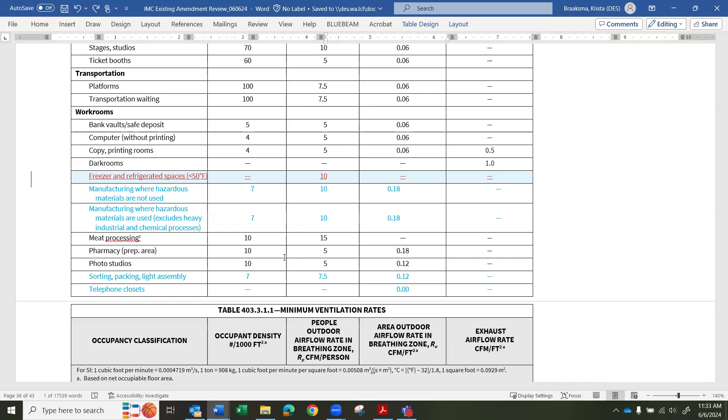Aye. Aye. I'm wondering if I have a typo in the telephone closet one, let me double check, because it seems odd to include it and have no requirement. Don't ventilate that place. Well, that's what the model code says, it's 0. Okay. Oh yeah, I do remember seeing that.

I wonder if it's because we don't have telephone closets anymore. I've seen some offices add small phone rooms in, but sometimes they call them something else. Okay, thank you. I think the flag is there because there's just so much that got added, with the whole new spaces for animals and outpatient healthcare facilities.

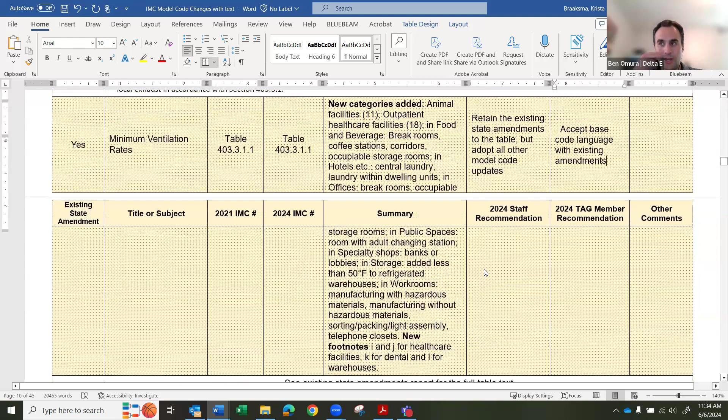Yeah, and Krista, I know we had existing amendment changes for this tabled. Do we need to look at that again real quick? We can. Okay, just so we can close that out as we're going. Maybe someone wants to make a motion to retain existing model code amendments here as well, for the table.

Could that just be added to the motion to adopt state code amendments? Revise the motion to adopt model code changes and retain state amendments to the ventilation table, I forget the numbers, 403.1.1, 403.3.1.1. Is there a second to, or update the motion, Laura, do you accept that modification of the motion? I'll second it. Did that answer your question? Yes, yep, that works.

All right, all those in favor of recommending adoption of model code changes to table 403.3.1.1 as well as retaining existing state amendments, please say aye. Aye. Aye. Any opposed?

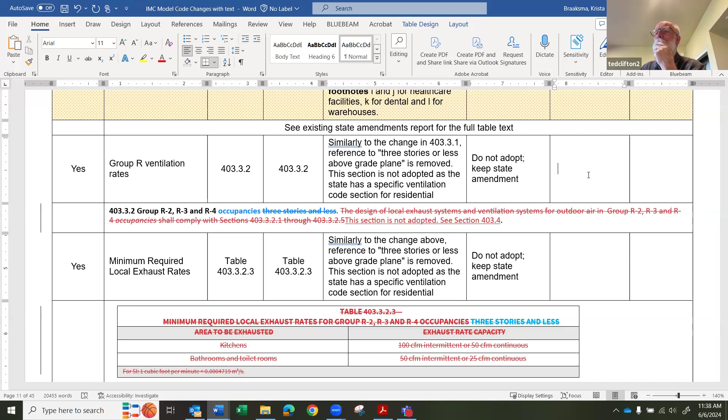I don't know if someone wants to make a motion to go with the recommendation to not adopt. I'll make that motion. I'll second that motion. Motion is seconded to go with the staff recommendation to not adopt model code changes per existing state amendments to section 403.3.2. All those in favor, please say aye. Aye. Any opposed?

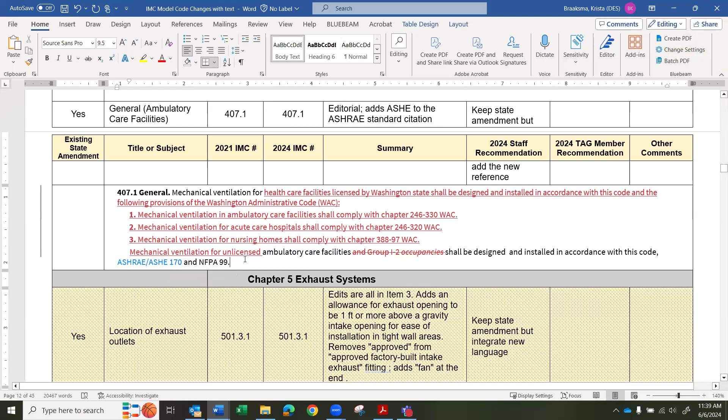Any discussion here? Someone want to make an amendment or motion to recommend adoption? I'll make that motion. Second. Motion to recommend adopting model code change to 407.1. All those in favor, please say aye. Aye. Any opposed?

And we're into chapter 5. Okay.

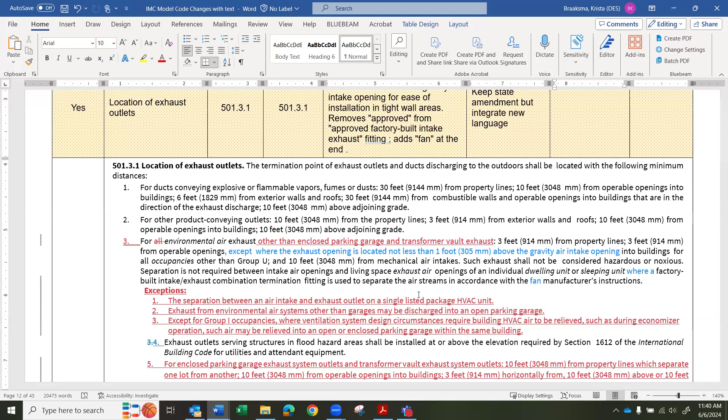501.3.1, item 3. Adds an allowance for exhaust opening to be 1 foot or more above a gravity intake opening for ease of installation in tight wall areas. Removes 'approved' from 'approved factory built intake exhaust fitting', and then adds in 'fan' again.

So I'm assuming this would be the same comment on replacing fan with a different term, possibly. And then there's the change in separation for the exhaust opening proximity to a gravity air intake opening. And I guess you had flagged this as significant.

We were thinking for the opening separation change, it seems like it would potentially decrease cost, but it would be significant. So would you advocate removing the significant flag? It could be a significant cost decrease, I would say, but probably not an increase. Or just a significant change? Yeah, I think significant change would make more sense. Yeah, that makes sense.

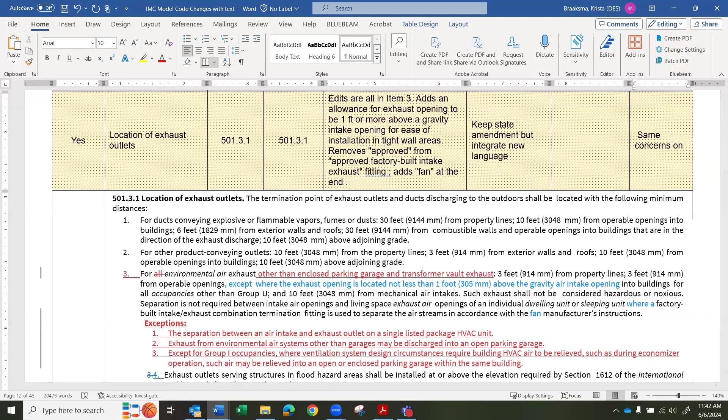Would someone like to make a motion to adopt the model code change? I'll make that motion. Is there a second? Thank you. Any discussion this section? Hearing none, all those in favor of recommending adoption of model code changes to 501.3.1, please say aye. Aye. Any opposed?

Okay, a new section on common ducts that only allows them under negative pressure. I'll move that we adopt that. Second. Any discussion on this added section?

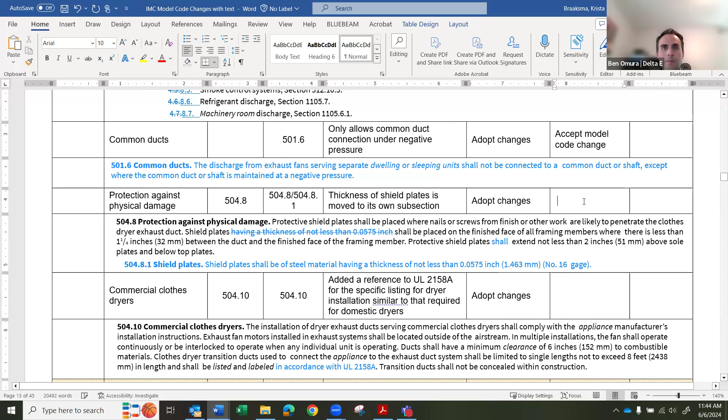Okay, and again, we've got another shield plate that is moved into its own subsection. This one was originally 0.0575 inch, so that's probably why the other one was also changed to be the same. I guess for everyone's benefit, this is within the clothes dryer exhaust section.

Motion to adopt changes to 504.8. Second. Any further discussion? Hearing none, all those in favor of recommending adoption to section 504.8 for the model code changes, please say aye. Aye. Any opposed?

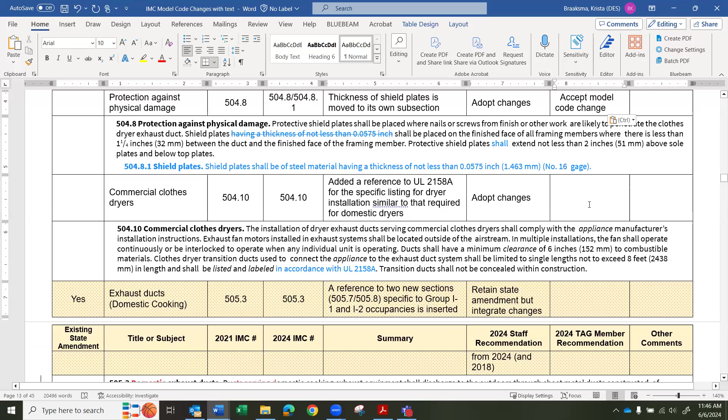504.10 just adds a reference to the appropriate standard in the commercial clothes dryer section. I think previously this is just purely adding it. It used to say listed and labeled without the UL reference.

I'll move we recommend adoption. Second. Any further discussion? Anyone feel there's a significant cost change by having the UL reference? I think the listing and labeling requirement previously probably carried most of that cost, but yeah, I don't think it'd be significant. Hearing none others, all those in favor of recommending adoption for section 504.10 model code changes, please say aye. Aye. Any opposed?

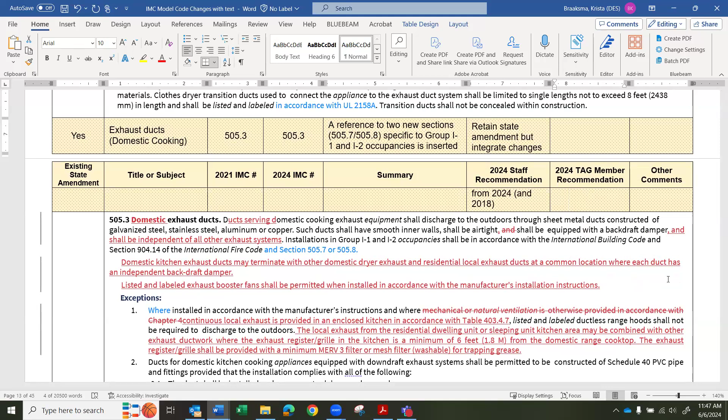Okay, 505.3, this was the one that we had also flagged in the existing state amendment where they reference the two new sections for Group I occupancies, section 505.7 and 505.8. And whether to incorporate those two sections, or keep it as it was previously, and in that first exception, just exempt Group I1 and I2 occupancies.

What do sections 505.7 and 8 have to say? Oh yeah, right, those are there. Yeah, we had tabled that, the existing amendment review, so we could look at all this together. So you've got the requirements for Group I1 and Group I2. And then I had these flagged as significant changes as well, with the new requirements for those two occupancies.

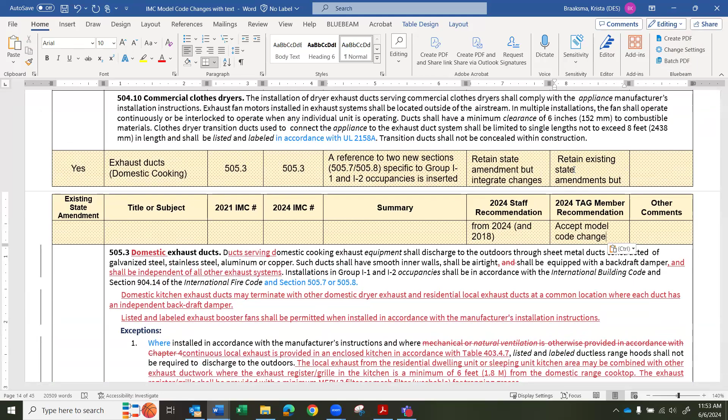So I'm going to move to adopt these changes. Kevin, do you want to specify adopting 505.3 as well as these two added sections? Let's make this complete. So the motion is to retain existing state amendments and integrate changes from model code for sections 505.3, 505.7, and 505.8.

Keep in mind, group I1 would include conditions 1 and 2, which you're looking at voluntary treatment centers and things like that too - assisted living facilities, where you might have like a kitchenette for staff to use or something like that.

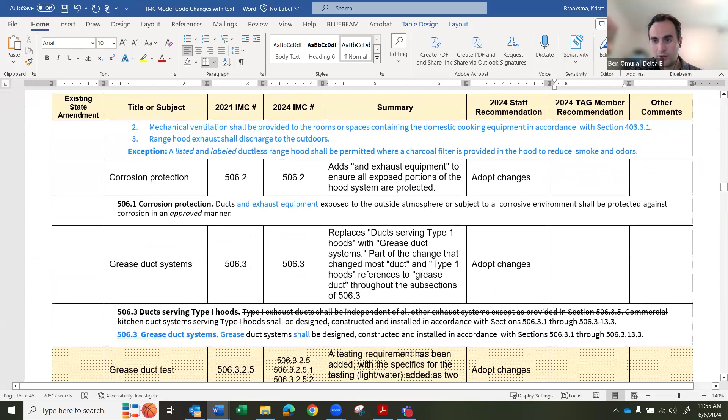Okay, so motion is on the table. Is there a second for this one? I'll second it. So, motion and second to retain state amendments to section 505.3 and recommend adoption of model code changes to 505.3, 505.7, 505.8. All those in favor, please say aye. Aye. Any opposed?

All right, so we are 5 minutes out from our time, and we still got a couple more sections to go. I think, Krista, you need us to get through this, is my understanding.

Well, actually, if I can invite Dustin to speak to us. Good almost afternoon, everybody. So just like with this group here, the IFC and IBC TAGs are not moving quite as quick as we had hoped to be moving on these reports. Right now, I believe each one of the tags has at least one meeting left before the committee meetings.

But if we're not getting these reports done pretty much by tomorrow, we're running up against some APA open public meetings requirements. So we wouldn't be able to get this document out for public review before the committee meeting. And if we push the committee meeting back towards the council meeting, we'd still be running up against the report being approved by the committee and available appropriately before the council meeting.